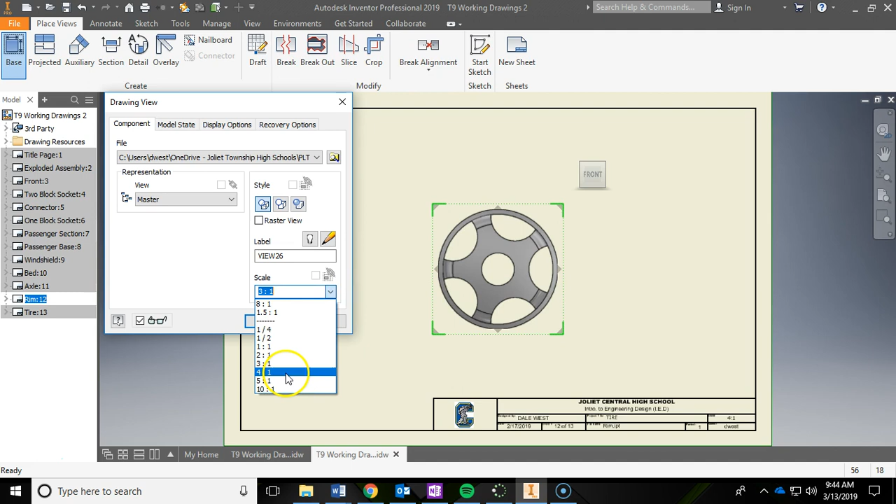So when we place our view with our base, when we go get our rim, you're going to have to rotate, or no, actually I'm sorry, that is the front. I take that back. We're going to start with the front. Yeah, that is the front. So we're good. We're going to start with the front, but remember we want a 4:1. Say okay. I'm going to move this over.

And actually, you know what? I'm going to project the isometric off of that as well. So I'm going to go project that, right click, create, move that over here. That should be shaded, so I'm going to double click and shade that. And then now I need to add in a center mark. So remember, place all the views.

Or no, I'm sorry, we got to do the section view. Alright, so I'm going to go ahead and click on section. I'm going to click on the front view. And then now, if you notice in the bottom left corner, I am determining the cut. So that one does a 90-degree angle. So we want to make sure we're cutting right through the middle though. So I'm just going to hover over the middle.

And I'm going to bring my mouse directly out to the right, and then this is where my first click is going to be. Somewhere on the outside of the rim out here. But I'm referencing the center. So I'm going to left click a second time at the center of the rim, and then left click a third time down here to create that 90-degree angle outside of the rim. So I made 3 clicks, and then now I'm going to right click and continue.

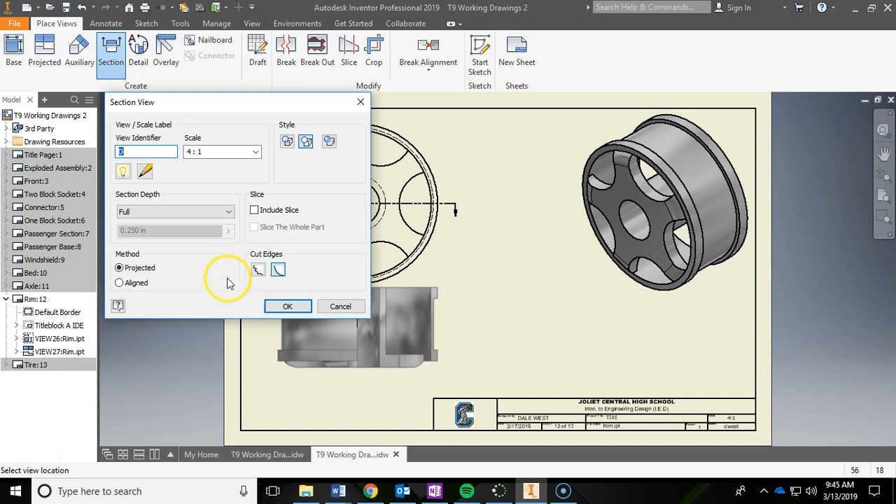And then if you move your mouse up or down, we want to go down because we want this half section view to replace the front view. Notice the label is automatically going to letter D. So I'm going to click OK. And I'm just going to pull this down to get it out of the way a little bit. So now I have all my views, and I am going to add in a center mark.

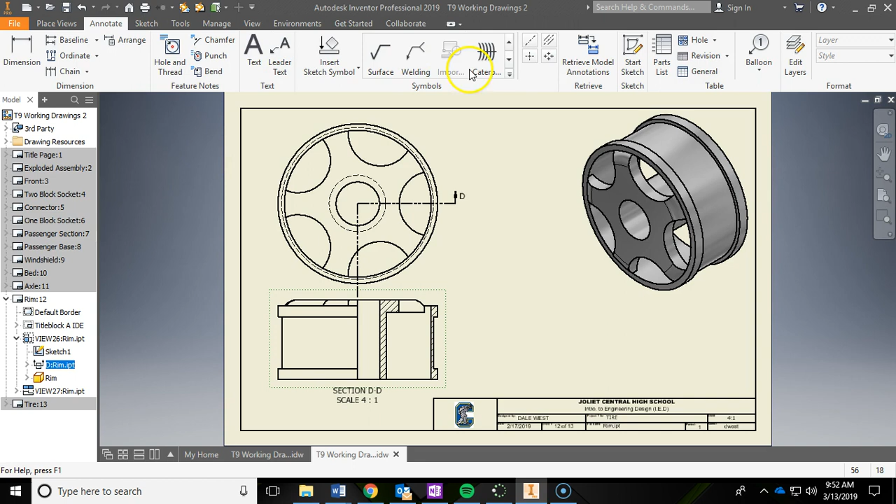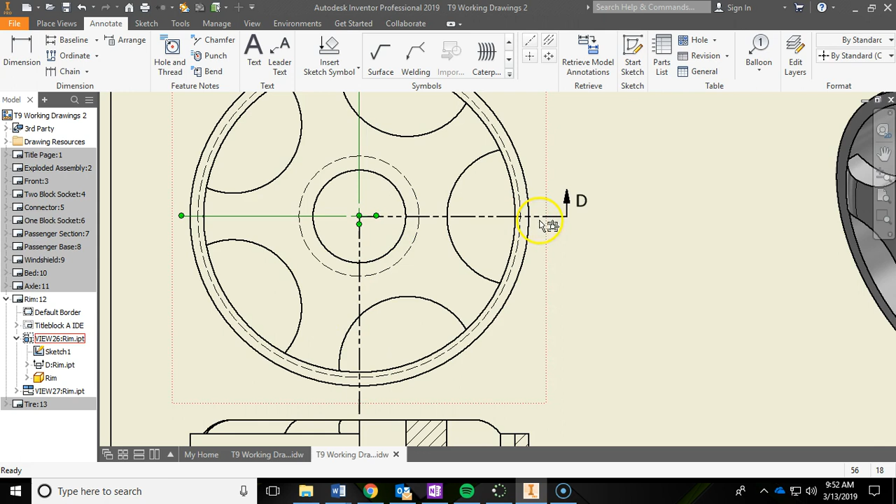And you'll go to annotate, center mark, make sure you click on the outermost concentric circle, hit escape to get out of that tool. Now the only thing I don't like about that center mark is it's running through the cutting plane, so if you click on it, you can drag this green dot in to about right there, and then grab this green dot in, so then you can actually see that cutting plane line and it's not going through it.

The other thing that we need to do is for a half section view, this middle line should actually be a center line. So what we need to do is turn off the visibility of all these little lines here and then draw a center line right down the middle. So to do that, you're just going to hover over the various lines, right click them and turn off the visibility.

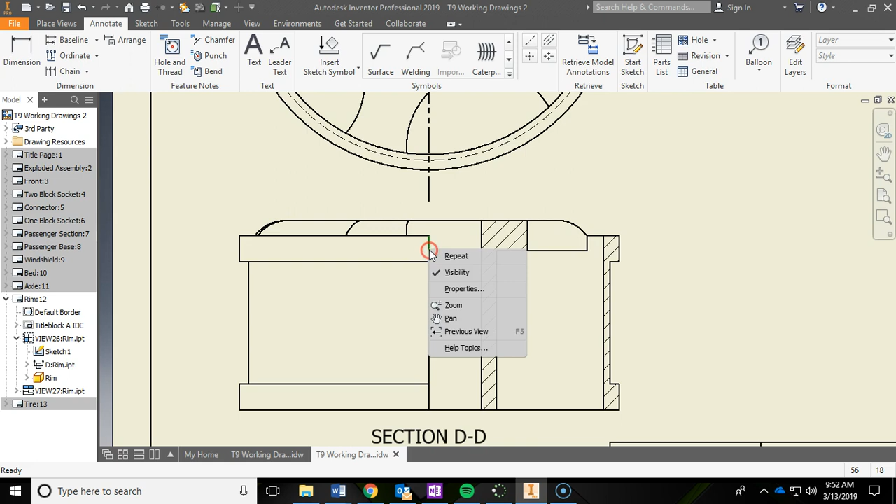So select, right click, turn off the visibility, and then I'm going to use my center line tool right here. And I'm going to go from the midpoint there to the midpoint here, right click, create, and now I got a center line going right down the middle. And I believe you should be able to do everything else on your own.

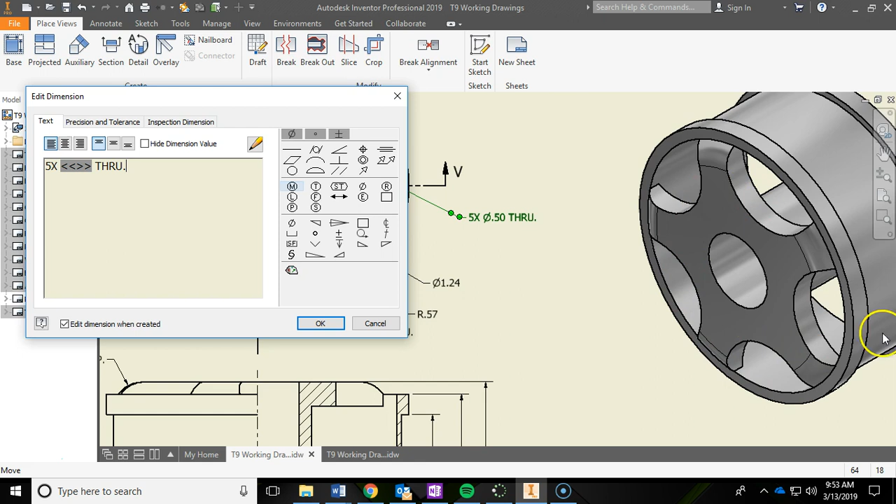You'll notice that this one, I've added some other terminology to the dimension. I've added a 5x in front of it, like you see there, and then I added the word through, or THRU, which is an abbreviation, because there's 5 of those cutouts and they go through the model. So you'll need to add that.

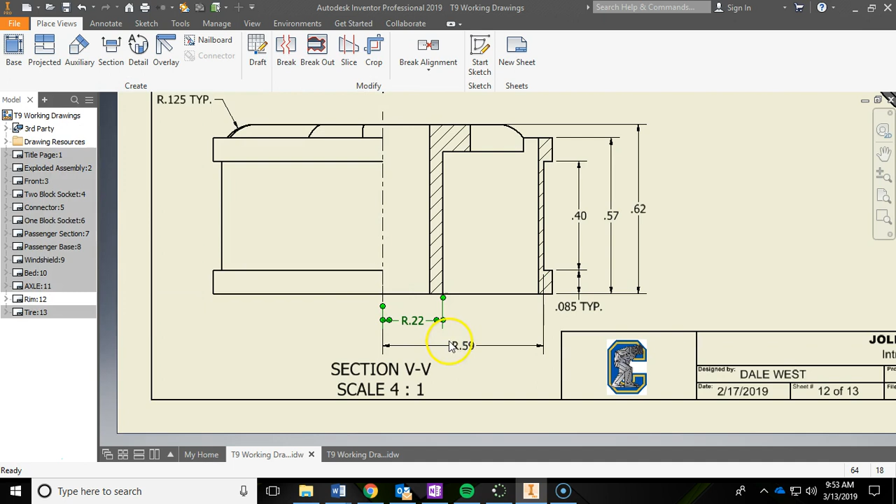You'll notice I added the word through as well to this dimension, because that hole goes all the way through. And finally, you're going to notice that for these two measurements, I added a radius symbol in front of them because this is a cylindrical feature.

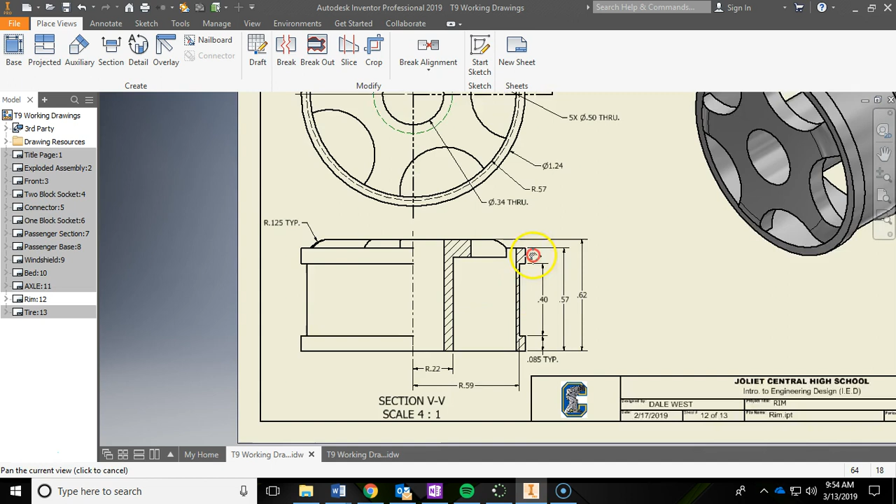And the reason why I had to give these 2 circles in this section view is because they are hidden in the front view here. So if you look, this circle is represented by the radius right here. It's from there to there, which is a dimension from here to here. And then this one is for this hidden circle, because remember, you want to avoid dimensioning to hidden features.

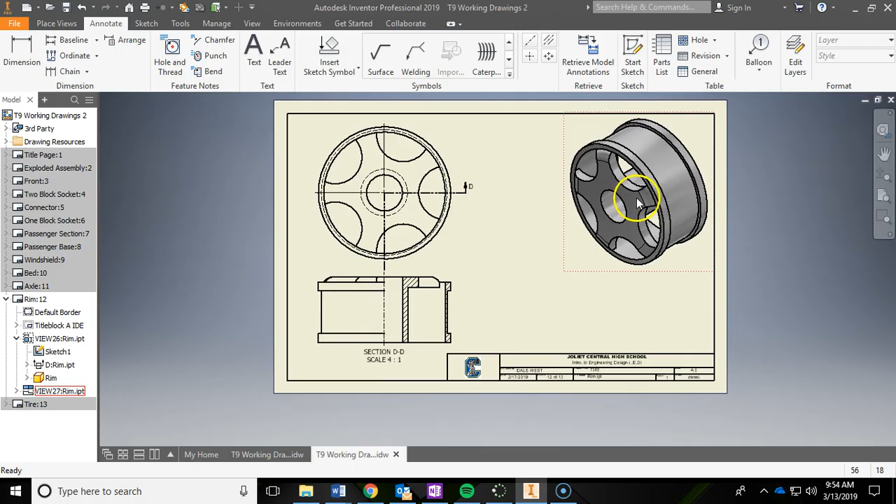So go ahead and knock out all those dimensions, make sure you add all your typicals, and again, don't worry if your label is different than what you're seeing on the screen. I think we are on D though by now. So go ahead and add in all your dimensions and then screen clip it into your binder for your points.